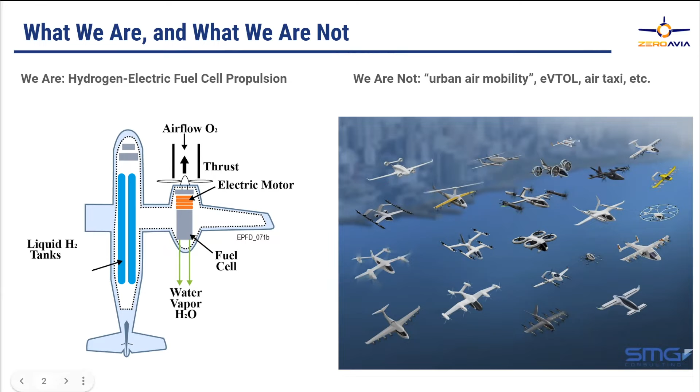So in the aviation industry today, about 5 to 10% of total global warming is a result of aviation fuel combustion. I say 5 to 10% and not a more specific number because there's some uncertainty, about a factor of 2, in how much of the CO2, H2O and particulates emitted by aircraft stay in the upper atmosphere for how long, and how much they affect the total infrared radiation from the surface getting back to space, and therefore affect the net warming of the planet.

As ground transportation and ground industries shift to more renewable fuels, we don't really have a good alternative for powering aircraft over long distances. So present forecasts show that this 5 to 10% contribution to CO2 in the atmosphere could become 25 to 50% over the next 30 years, partly because of increases in aviation, but partly because of decreases in other CO2 contributors.

So how do we get around this problem? We've looked at battery electric, turbine hybrid, biofuels, synthetics, hydrogen combustion, and really, other than the hydrogen fuel cell, we don't see a solution to the problem.

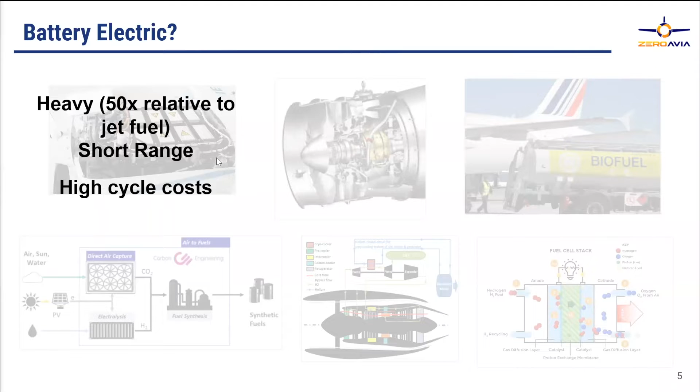There's also a problem of life cycle costs. Batteries don't last for many thousands of cycles unless you only use a fraction of their capacity. But if you use much of their capacity, then their lifetime is short. In aircraft, because the battery is so heavy and costs energy to fly weight through the air, you pretty much have to use a large fraction of the capacity, and therefore you have short battery life, and therefore the cycle cost in the aircraft is pretty high.

Hybrid engines make a lot of sense in a Toyota Prius or a ground vehicle because it's stop and go driving most of the time. You can put momentum into the vehicle and then take it back out and stuff it back into the battery. For aircraft, that's really not the way we fly. There's a large continuous power need, so you have to size the propulsion system, the energy creation, to that average propulsion need, which is very close to the peak power needs.

So spinning a generator with a turbine loses 10%, or spinning a generator, storing it in a battery, taking it out of the battery, driving an inverter to spin a motor - altogether that loses at least 10% of the energy, basically for no benefit. So we don't see a reason to do hybrid in aircraft, at least for long distances.

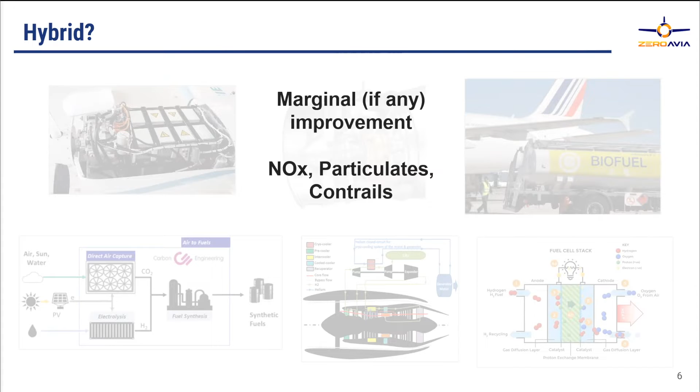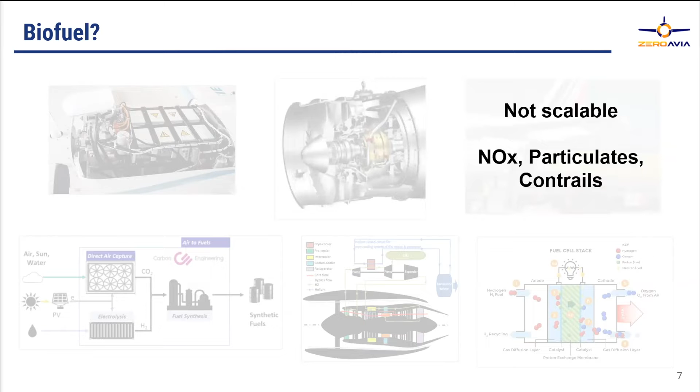Biofuels, they're a great idea because they take carbon out of the atmosphere. You store the energy as a liquid fuel, very easy to transport, easy to control, but it takes a lot of land to grow the biofuels. They're taking that away from food production. If we did this to any significant scale, we'd be cutting into the world's food supply. And we still have the problem of carbon and water deposited high in the atmosphere, where they don't fall out as rain quickly and contribute to global warming again.

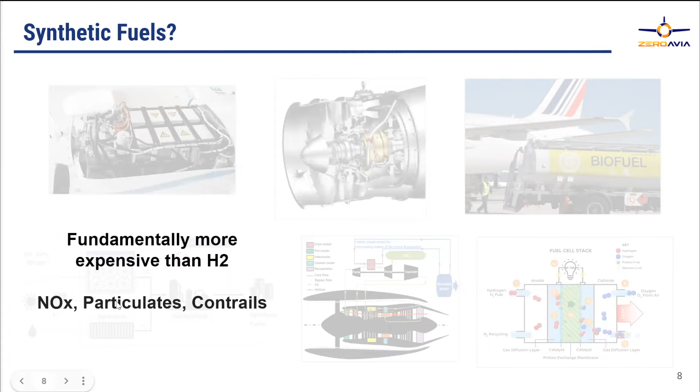Synthetic fuels have similar results as far as putting carbon into the atmosphere up high, and it's fundamentally more expensive than hydrogen. When you look at how synthetic fuels are made, you could use electrically renewably powered hydrogen production, combined with CO2 extracted from the atmosphere. Some of that process is already available through the petrochemical industry at fairly large scales. The petroleum industry has in their refineries quite a lot of hydrogen production, but most of that comes from natural gas cracking with water, or so-called steam reformer processes, which ultimately send that carbon into the atmosphere. The energy source was the methane versus oxygen in the air, so by the time it's converted over to electric renewable sources, it's still a very expensive process.

Hydrogen combustion - the nice thing about it is you can use engines very similar to or exactly the same as what we use today, but there are some material processes that would want to be changed. It is still a very high temperature process. The metallurgy needs to be changed a little bit to avoid hydrogen atoms entering into the metal, swelling it and causing it to become brittle. Also, it's a high temperature combustion process, so nitrogen oxides are made. The amount of water deposited in the atmosphere would go up, and the amount of CO2 would go down.

Water is also a strong greenhouse gas. Usually we think of water being in the lower atmosphere, below the tropopause in the troposphere, where weather deposits that water on the ground as rain in fairly short order. But when you deposit a lot of water into the upper atmosphere, it takes a long time for it to rejoin the weather cycle. And while that water is in vapor form in the upper atmosphere, it's blocking infrared radiation and contributing as a greenhouse gas.

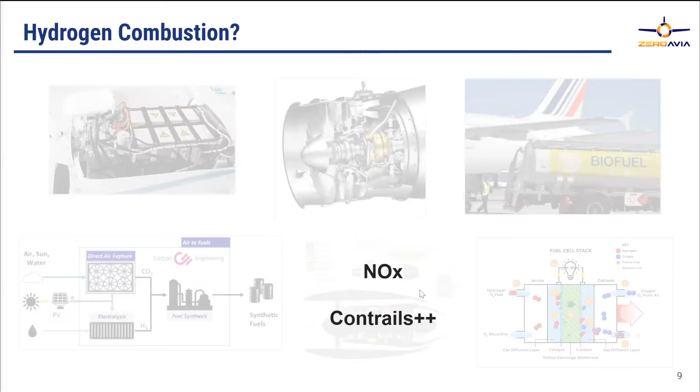Fuel cells, we believe, are fundamentally better. You still have water delivered into the upper atmosphere, but less of it because it's a more efficient process. We're also looking at ways to cause that water to fall to the lower atmosphere sooner.

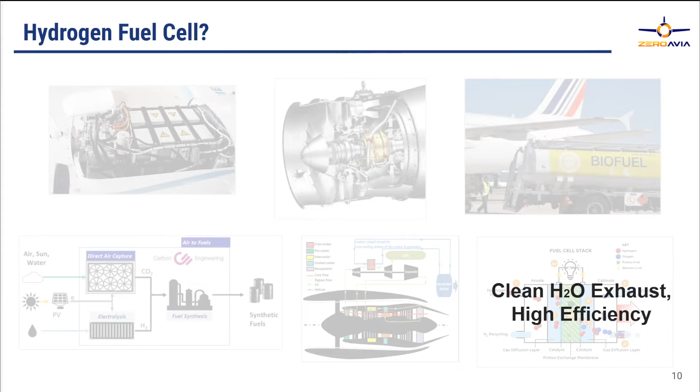So our overall vision is renewable electric energy sources, like wind farms and photovoltaics, driving hydrogen electrolyzers to make the hydrogen. That hydrogen can be at the airport. You don't need pipelines and trucks carrying the hydrogen around, which is one of the infrastructure limitations today that makes hydrogen less practical for ground vehicles.

To support ground vehicles, you might need 500,000 or 50,000 fuel stations around the country. For aircraft, you could probably do it with 500, and a large fraction of the hydrogen would be at, let's say, the top 100 airports in the country. The hydrogen is loaded onto the aircraft, drives a fuel cell. It's basically an electrochemical combustion process - you combine oxygen in the air with the hydrogen in the fuel to make electricity. The electricity goes through an inverter or motor controller, spins the motors, the motor drives the propeller to create thrust. The water and heat go out the back.

There's some momentum for introduction of hydrogen for ground vehicles and for ground energy needs, but really there's quite a bit more momentum in the aviation segment, partly because it has very high energy density, and partly because the alternatives, like I described before, are not very viable. Battery electric is just really not viable for aircraft, and the 5 or 10% improvements you might see in a year aren't even close to getting us there anytime soon.

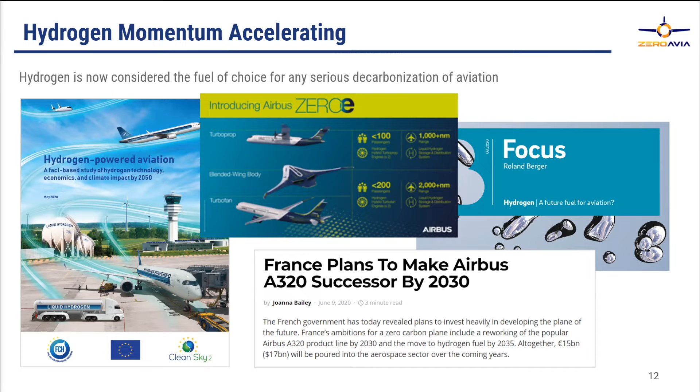In getting to that point, we've flown two 6-seat aircraft, both Piper Malibu or Mirage type aircraft, one in the US and one in the UK. We've done both United States and UK development, partly because that's where the government funding has supported it, and partly because fundamentally aviation is a very international industry. We have customers and suppliers throughout the world, and to work with them, we don't want to be a single location entity.

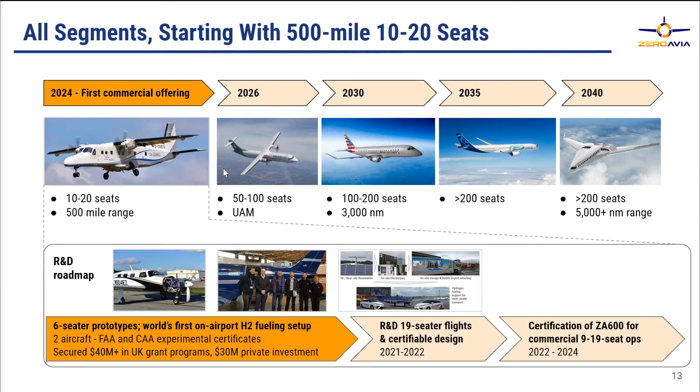In the UK, actually where I was just yesterday, not far from Oxford, we've got about 40 or 50 people working on the development of a certifiable design for this Dornier aircraft, and also for next stages in the larger aircraft.

The 19-seat market is a little bit special for regulatory reasons. There's additional regulations and limitations on the operation of the aircraft starting at 20 seats. The FAA's requirements for certifying a 20-seat aircraft are considerably more stringent than a 19-seat aircraft.

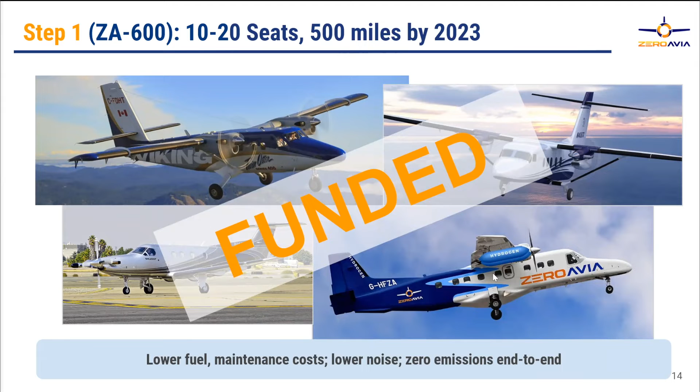It lets us scale up in steps of 3 or 4 and not steps of 10 - the larger the step in scale up, the more the surprises. And at around 500 miles, it serves a lot of the market. We believe we can do 500-mile range on this type of aircraft using hydrogen fuels.

Of course, there's a big sticker across the page that says funded, and what we mean by that is we have investment funding in the company sufficient, we believe, to carry us through this stage. We also have in-kind funding from companies like Alaska Airlines and their subsidiary Horizon to actually provide the aircraft we're going to use. So they're providing a Dash 8 like the one on the right, and we're setting up the hangar to get ready to start work on that plane soon.

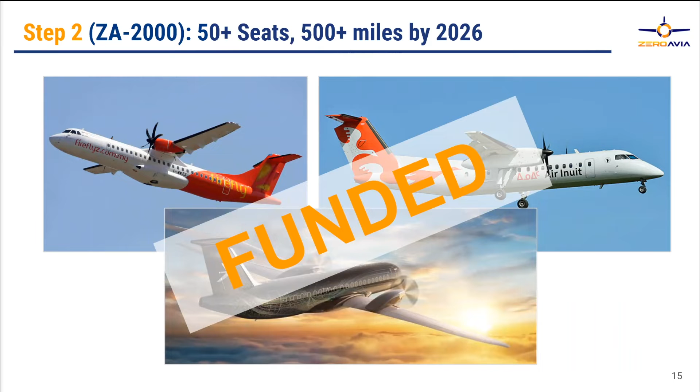It's been in the news a lot. We've got a lot of interest throughout the world and throughout the aviation industry in supporting ZeroAvia to do these projects. As a scientist and engineer, this isn't my focus, but it's a necessary part of the overall development of aviation. It's not sufficient to design a good product - you also have to sell it, and you have to get it out into the community so that people can recognize it.

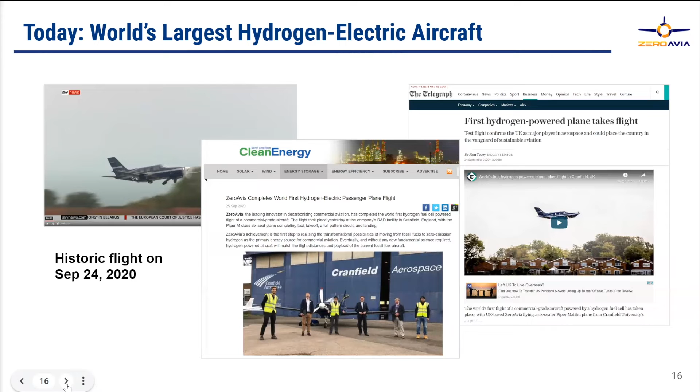They can build the infrastructure that supports it, start training mechanics to work on electric motors and not just combustion engines, and so on. The whole infrastructure around aviation has to be developed, and we're doing that in part by developing our partners - companies like Shell that are providing fuel, companies that maintain the aircraft, and companies that build and install engines in them. They're all desperately interested in this because frankly, they see the writing on the wall. Kerosene is a problem, and they both want to be good citizens and want to be seen as good citizens, so that they can maintain their business and their future revenues.

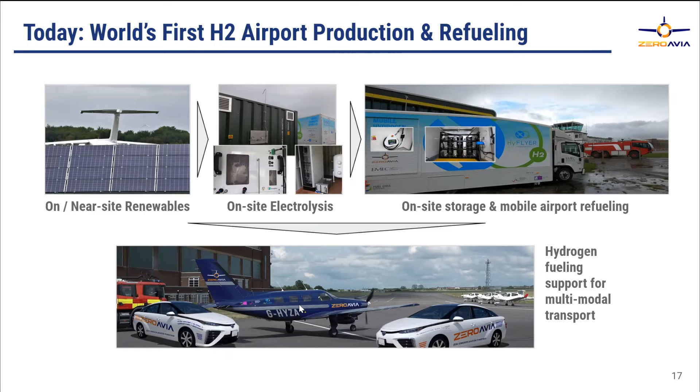At present, this airplane is in the shop. We've taken one turbine engine off of it, and we're putting the electric motor on it now. It'll fly initially with batteries while we test the electric subsystems, the software, the controllers, the motors, the rest of the propulsion system. Also, thermal management and how the motor powers all the other systems in the aircraft isn't an afterthought for us, it's an important part of the project. When we take the second turbine off next year, we've got to provide power to all the other things in the aircraft: the landing gear, the controls, the electronics, the air conditioning. So all of those subsystems also need to be powered in addition to the propeller itself.

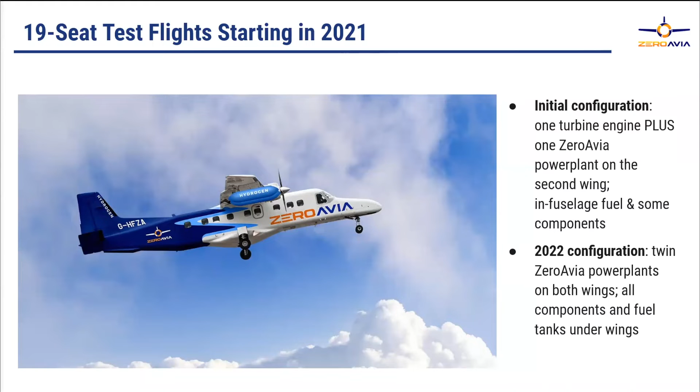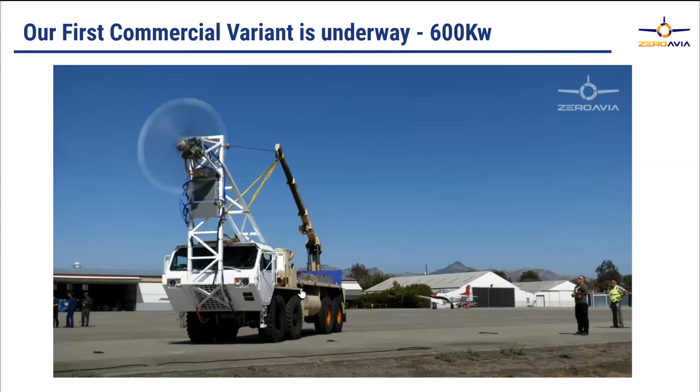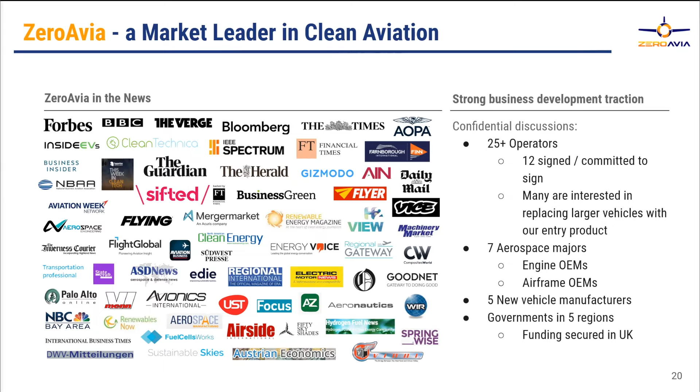Again, I mentioned we're getting a lot of press. These are just some of the publications that have recently published stories about ZeroAvia and about the work we're doing. And again, that's important, not just because it helps us get funding for our company, but also because it develops the whole infrastructure that makes hydrogen electric aviation possible.

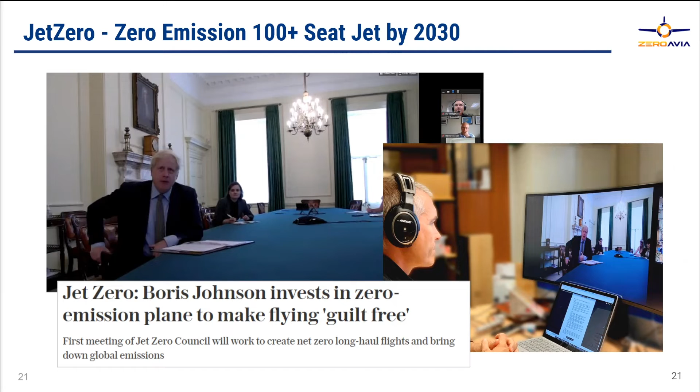And government support as well as the commercial support. We've got substantial funding from the Aerospace Technology Institute in the UK, which is sort of their equivalent of NASA. We have a substantial amount of US funding as well, based on hydrogen infrastructure, some parts that are in the present infrastructure bill working its way through Congress, and some that's currently funded already.

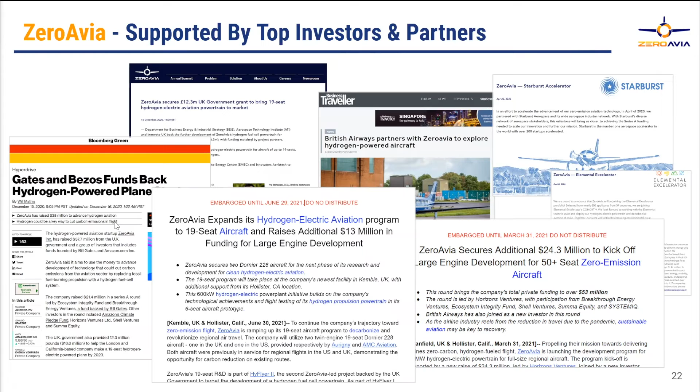And then on the private investment side, both the companies that are already in the aviation business and see a particular need to transition out of combusting hydrocarbons and into electric or hydrogen power, and also the like the Gates and Bezos funds that are looking at basically saving the world from overheating and melting all the glaciers. This is one of the more potentially cost-effective ways to reduce the carbon deposited in the atmosphere today.

So with that, I'm going to say thank you on behalf of the investment side of the conversation.

Most of the slides up to this point were really aimed at investors and at not very technical people, but we're here with the Hertz Foundation, so I expect that a lot of you have much more technical questions that I haven't answered yet. I'm going to open it up for questions shortly, but first I'll throw out a couple of categories where I think the questions should probably be centered, or where I expect them to be centered.

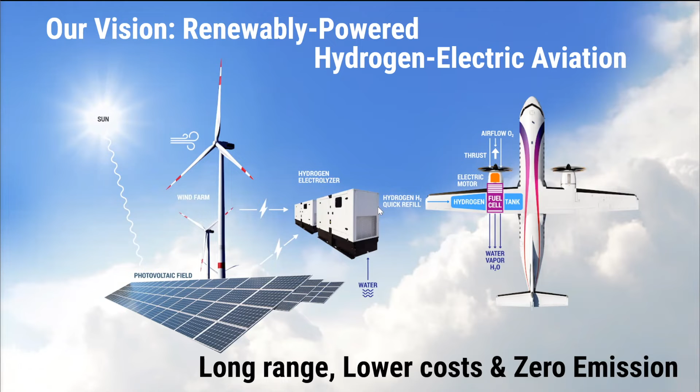In this overview of the infrastructure, we see the ground-based energy collection, the hydrogen generation. I've really glossed over some things here. This electrolyzer is somewhat complex. It has very strict requirements on the water going in. It has expensive catalysts. It has thermal management and a bunch of other things inside it. It's not just a simple membrane where hydrogen magically comes out on one side after electricity goes in on the other side. Once you make the hydrogen in that electrolyzer, it needs to be either compressed to very high pressure as a gas, and that heat needs to be dissipated, or refrigerated to make liquid hydrogen.

Fundamentally, for long-range flight, liquid hydrogen will be a requirement. The fuel tanks to carry gaseous hydrogen at high pressure are heavy.

We get somewhat better than 10% gravimetric efficiency, so it takes a 90-pound tank to hold 10 pounds of hydrogen as a gas. It doesn't really matter much whether it's a big tank at low pressure or a small tank at high pressure—they turn out to weigh about the same.

Also glossed over here, the fuel cell. At first glance, that fuel cell is just a simple membrane with some catalysts. You put hydrogen on one side and air or oxygen on the other side.

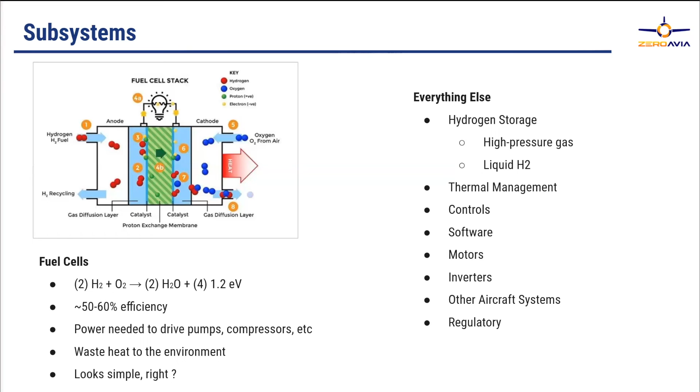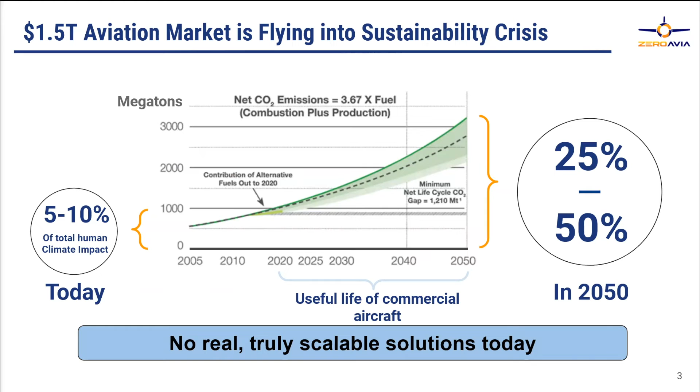I was curious about your early slide on alternative ways to power aircraft, comparing hybrid and things like that. Is there any hope for solar powered aircraft or nuclear powered aircraft? Okay, I'll take those two separately. Let me pull up that slide. So, solar powered aircraft.

That said, I helped build a solar powered airplane that flew across the country in 1990. It was called the Sunseeker. My friend Eric Raymond built it, and I helped with some composite construction and motor and inverter development. But to make that possible, it needed the very best thin film solar cells at the time, and had to be an extremely lightweight aircraft with very marginal strength requirements — just barely strong enough to fly safely, for one person, really a glider. Even putting the solar cells on the wing added drag and weight, and the power they produced more or less compensated for that, but it didn't make the airplane fly on its own.

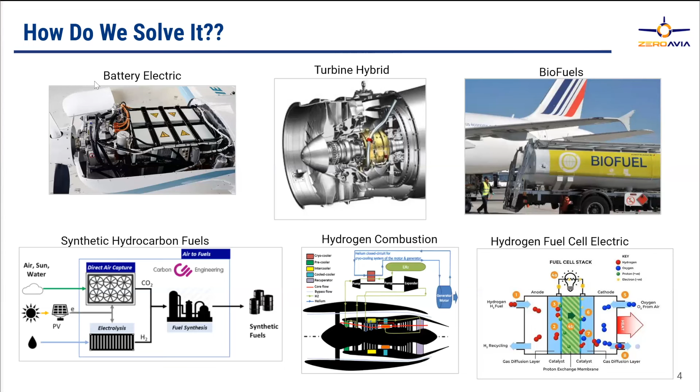How much more expensive would jet fuel have to be, or how much more expensive would an airplane ticket have to be on a conventional plane before a hydrogen plane made sense, or became preferable? So I'm gonna sidestep - how much worse is a hydrogen powered plane than a conventional one, if you ignore all those externalities?

So, ignoring the externalities, it's possible to build a hydrogen airplane using technology that we know about that is cost competitive directly.

Now, that assumes that we have hydrogen electrolyzers we can build at industrial scale and industrial cost basis, and that we continue to make renewable electric sources at a presently cost-competitive rate. You mentioned at what gasoline price is an electric car competitive? The answer is we're already there, for cars, we're already there.

That's done. How much further does it have to go to support airplanes? The answer is it isn't actually about the cost of the kerosene or the cost of the hydrogen.

The hydrogen airplane will be much cheaper to maintain in some ways because it doesn't have a high temperature combustion process, and doesn't have a 20,000 RPM turbine trying to throw its blades out at high temperature. Those hot cores have a finite lifetime and a scheduled replacement time, and it's expensive. Those are multi-million-dollar engines replaced on a few-year cycle at the most when in frequent use.